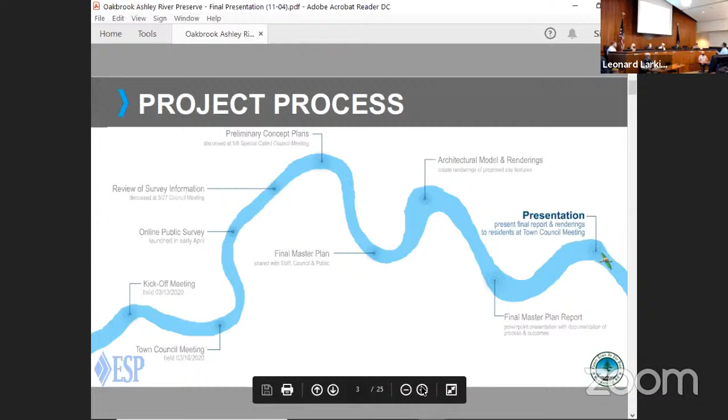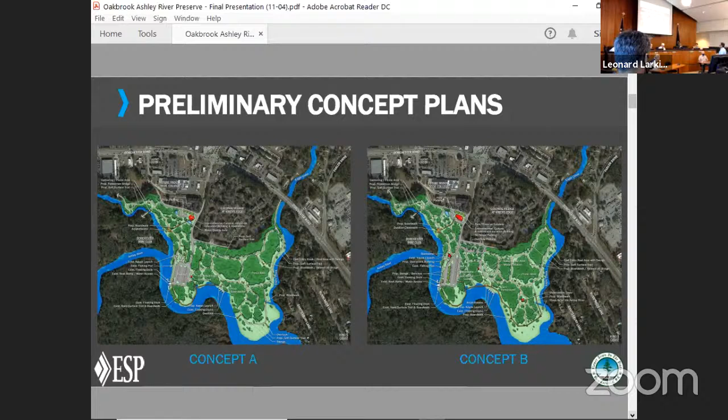So from these two concepts, next slide, is really where we started to nail down some of the program elements. As you might remember, before we had two columns, an A column and a B column of the different programs, and we've taken this opportunity to streamline it into just one column of what our programs are.

An amphitheater, outdoor classroom amphitheater - it's not really a big amphitheater where Dave Matthews or somebody's going to come in and perform. This is a small venue, more of just a gathering along the Dorchester Creek side of it. I would call it the classroom. Again, 3 restrooms, 2 of them in buildings and one's in the multi-use facility.

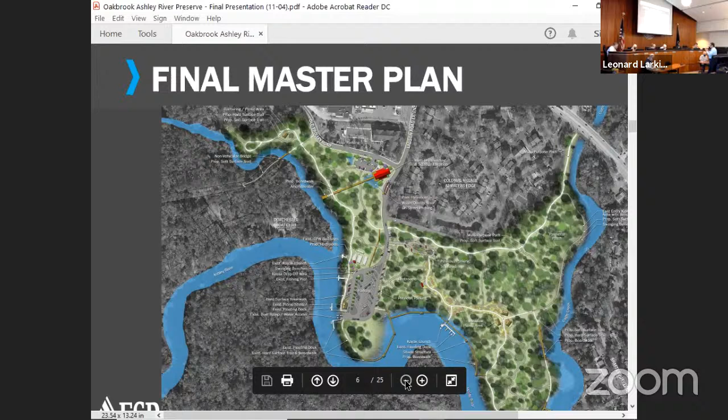Existing boat landing—again, we tried to stretch out the parking lot as best we can, make it more efficient with boat parking, and put a lot of the single car parking around the edges. So if you fish off the edge right at the Ashley River, or on the other side, you can park and take a walk through the woods. The cars with trailers take the most traffic and room; they're down at the bottom right-hand corner as I'm looking at this.

Whenever I put my boat in at this landing, it's always hard to get it in straight, and straight back out. So this is really for my own personal selfishness, to straighten out that boat landing access, so at least I have an easier time putting my boat in.

That's the objective. We're close to some woods and wetlands as we go. We show the existing boardwalk along the bend of the river, but we wanted to add a bit more boardwalk that takes you all the way to what we're dubbing the kayak docks—those are existing docks, and it's a nice way to connect you to them along the river. You're on top of the water, not on the land, so you're not disturbing that natural edge. It's probably going to be a great fish habitat too, along that edge.

Following along, staying on the river—as you come down to the next bend there's another small fishing pier, and then three fingered fishing piers that come out on the second bend of the river. Those fingers come out, not really connected to the boardwalk, but offer more opportunities for fishing and enjoying the river without actually having to be on a boat.

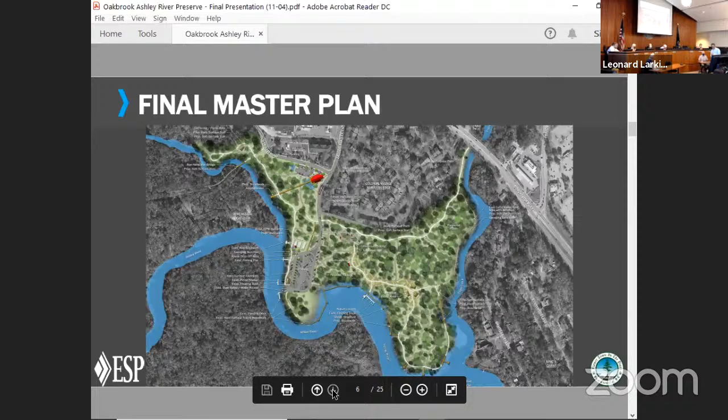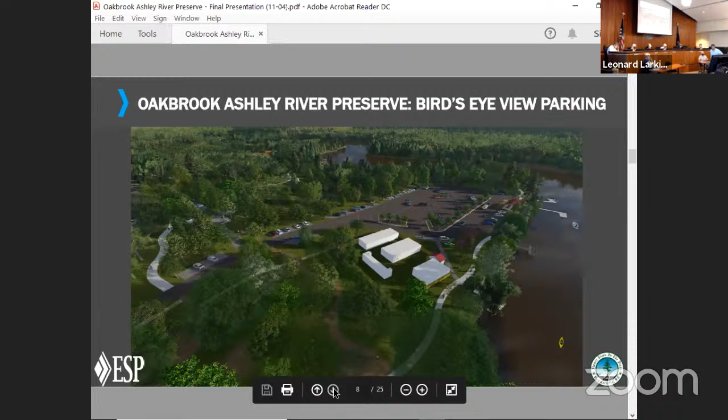A little close-up view. That might be the restroom facility right there, with the existing buildings. We'll enhance the parking lot a little bit. Next slide.

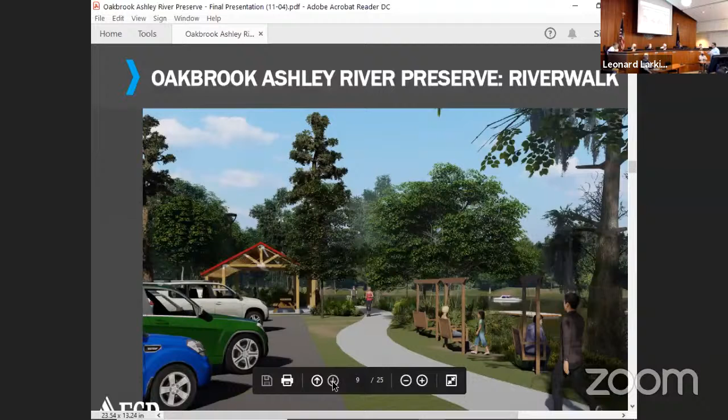This is the existing shelter that's there now, and it gives you an idea of what we could do along the river edge - create a pathway, put some swings there, get a little more activity. Right now it's just there, kind of eroding and trickling apart, so we're going to give it an edge so you can sit and enjoy it.

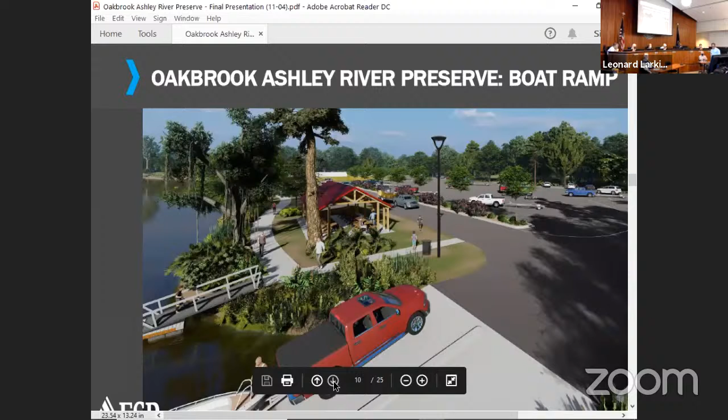Next slide. There's the boat ramp. Again, right now this shelter is surrounded by asphalt, and I'd like to break that up a little bit, add some green in there and soften it. This also gives you an idea of what the parking lot might look like. Right now there are no islands in the parking lot at all - we're adding planted islands to give a little more circulational control, as we call it. It softens things up and adds a little shade, at least a small piece of shade for your car while you're out on the boat. Next slide, please.

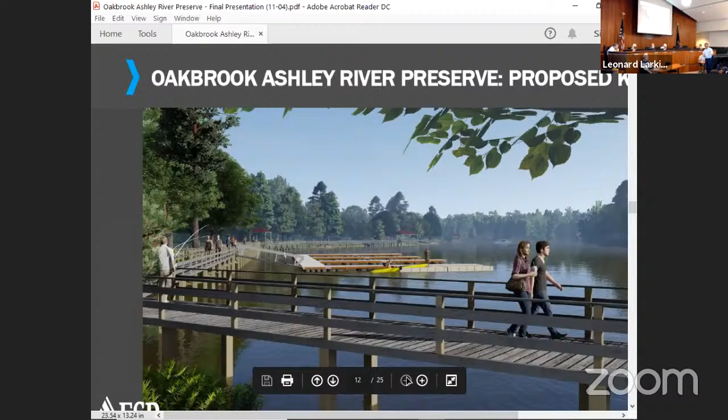Next slide, please - more views from the boardwalk, looking at the kayak launch and kayak docks. And then next slide - existing kayak docks with kind of an end terminus pierhead there, which takes you back inland.

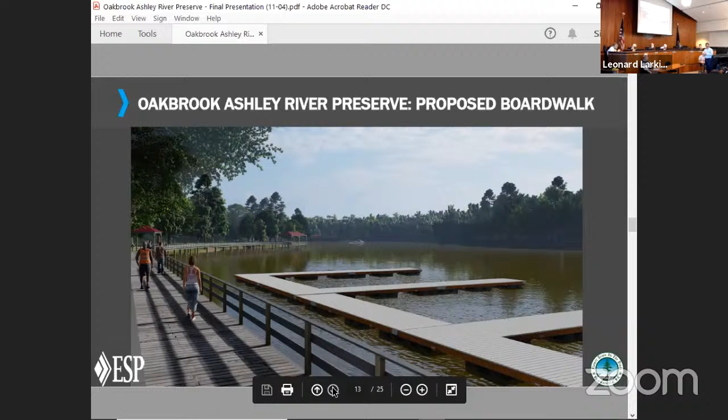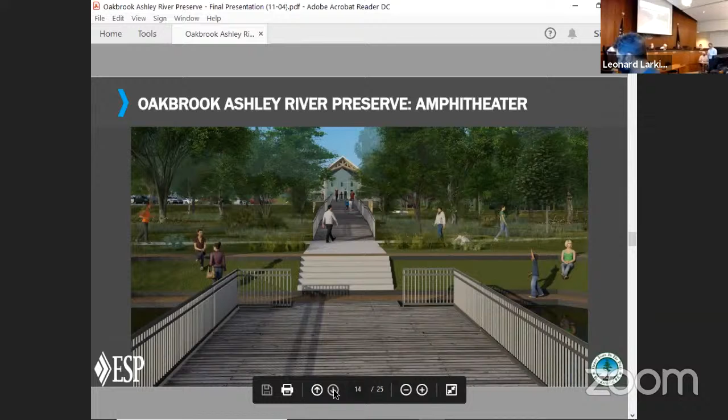Next slide, please - there's your building. Again, taking some cues from Colonial Dorchester State Park and what some of those buildings may have looked like - colonial building, knowing we don't build buildings like that anymore, but it can give it some of that look, with some signage there. Here's your entry feature.

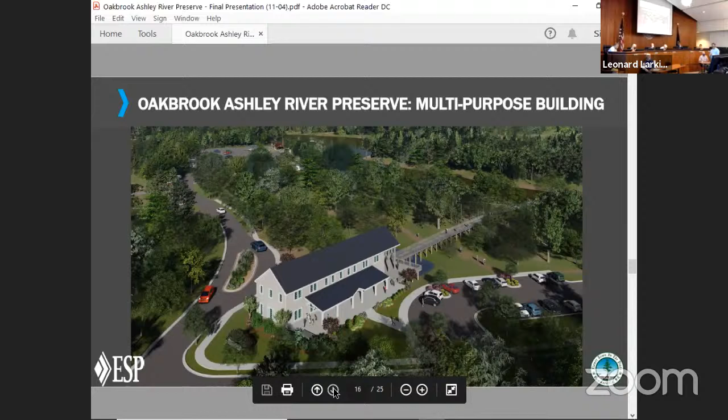So, cost. We're looking at a large budget number for this, and that's really what we're looking at. These are budgets. We've calculated all of our quantities for everything we're suggesting. We're using our best guess judgments based on recent projects we've done. We've spoken to engineers, given terms and ideas, and checked on where we are pricing.

As we all know, construction prices are fluctuating right now. Wood is going down every day just about. So at the moment, these are our budget numbers. It's a big number: $6.1 million for the dream, everything we're looking at.

And we've broken it down into sections rather than phases, because we're not really sure where we want to start. I have some ideas, but we can give you an idea of what each section might go for.

Starting with the red section, which is the boardwalk, the piers, and some pathways. We've broken it down into all the different pieces and parts: shade structures, the elevated trail, hard surface, and the pier heads. We always add the hard costs, the soft costs - surveying, design, engineering, and permitting - and we try to cover ourselves for contingency. So that's about a $900K scope of work.

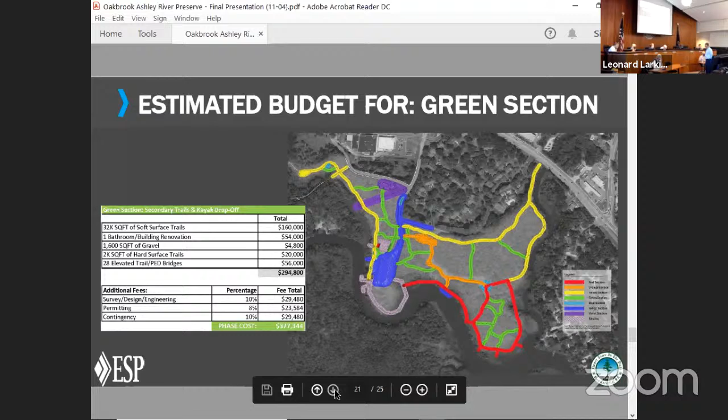Green: more paths, pedestrian bridges, bathrooms. $377,000.

Blue section, which is really a small area up here and the entry, with picnic areas down there. $314,000.

And then I think we had the orange section - piers, parking lot expansion, wetland mitigation that we might do. Again, we're not really sure how much spending we need to do at all. That's a little bit over $1 million.

And I think the last one is the purple, or violet section, and that's the building. We're looking at just a large $300 a square foot price on a building like that - parking lot, small amphitheater, classroom, boardwalk, and all that. About $2.6 million for that.

And again, that's all budget numbers - these are not actual costs. Things can change as the design evolves, but as engineers and planners, that's what we put together. I understand it's an enormous risk on our part to put big fat numbers on this, but I think that's what you asked for, and it at least starts the conversation. We know what the budget was, but at least we know that anchor point of where we are.

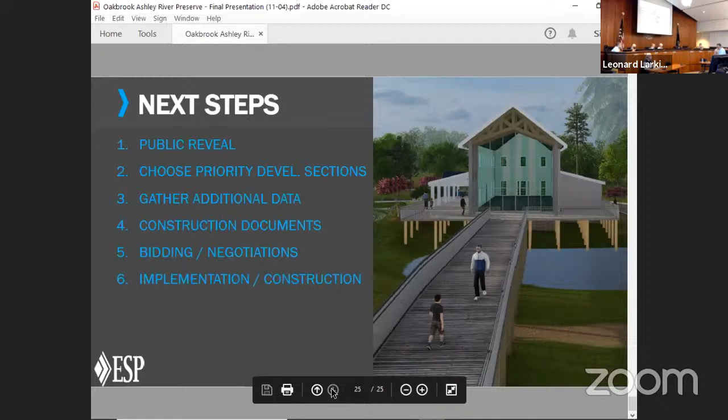It looked to me like when I looked at the renderings you had here, that there was a branch of the bike trail going down near the creek. Kenny, can you put that back on there where it showed the different colored path? Isn't all that yellow pavement coming across the top the bike path, and what's that to the far right extending down? Can you click back to where it says the orange section?

So the orange section, and we have this parking lot, obviously. I'm talking about that yellow line there, up at the top, below the woods. Starting there, going up, that is asphalt.

Now, coming down to where it branches off down here, what's that? That's gonna be a soft path, a mulch trail. Okay, so the only pavement would be across the top extremity there? That's the intention.

That's what we all talked about last time. Bring bikes through here so they can run through and then out, up the Sawmill Branch. The intention is, obviously, bikes are gonna come to the parking lot.

Yeah, but the intention is not to turn this into a mountain bike. Yeah, well, I misread what that was, okay.

Also, somewhere in here, there was $75,000 for wetlands mitigation. Could you explain what wetlands would be involved?

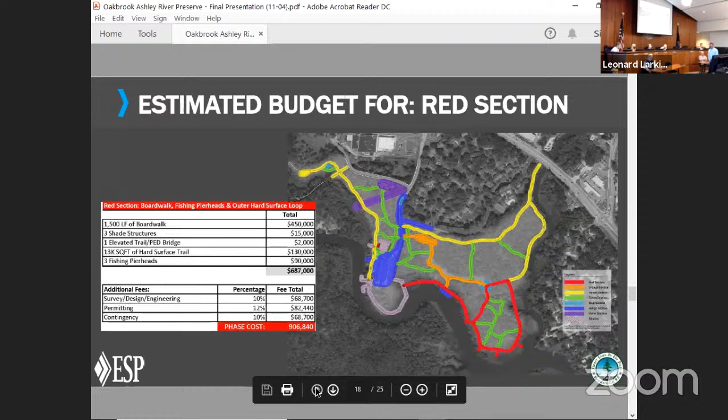Okay, and I think I've got one more issue, and I like it overall. Well, can you go back to the stuff that looks like photographs, but it's not? Rendering? Yeah, the renderings, where it shows the boardwalk. Yeah, well, that one.

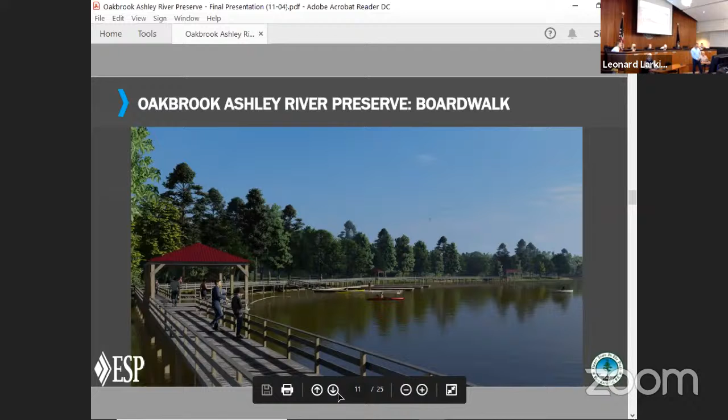Is this part of the existing boardwalk, or does that show? Some of it is existing. I think if you go back one more, go forward. I'm sorry, wish I was driving. That's new, that is new boardwalk. All that down here is new boardwalk, and all the way down to here is that new pier. That's that first fishing pier finger that you see out there.

Bob mentioned this when he talked a few minutes ago, but I'll mention it again. In the conceptual drawings, it appeared to me that the pathway along the riverfront would primarily be on the ground, a soft path where there'd be vegetation, and at points you couldn't see the river, maybe at other points you could, a view either of the woods or the river. I wasn't anticipating something that basically wrapped around the whole piece of property out in the water. I think that obstructs the view of the shoreline.

It makes a curved shoreline look angular, and in addition to that, it's a heck of a lot more expensive to have the pilings out there and all the lumber that you're showing. I think we could get a better product and save a whole lot of money if we had most of that stuff on the bank and not in the water. Again, the conceptual drawings appeared to show what I'm talking about, not something entirely in the water like that.

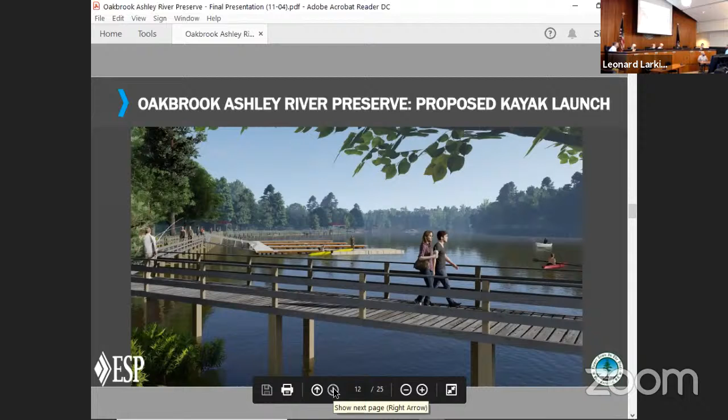I guess my thought from the renderings, I don't know if you're going forward or backwards, but it's a couple renderings over where it shows the existing shelter that has been landscaped a little bit. With that one, yeah, not the other way. Right, well these two together, the previous one and this one.

If the idea is that somehow or another we're going to eventually scrape together, I'd have to say at least $6 million, because it's only going to get more expensive if we do this over a fairly lengthy period of time, it just strikes me that not just the functional improvements but the aesthetic improvements to the parking lot, to include the rendering we're looking at now, and also the previous one, I think it's the previous one that shows the beginning of the Riverwalk.

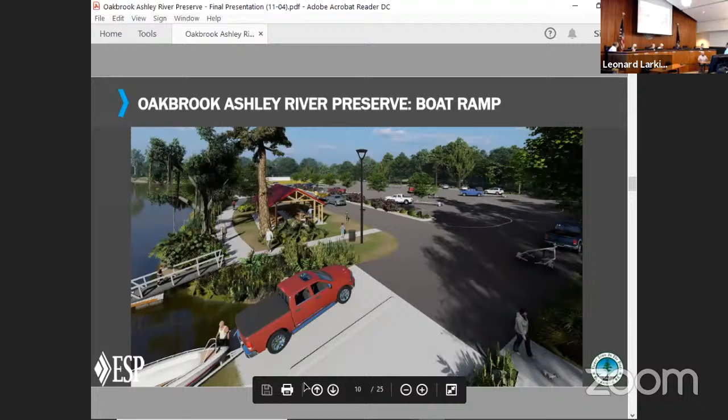That's how you're going to generate interest in this. I don't completely subscribe to the idea of build it and they will come. I don't want to, if we plunk down $6 million in the next 6 months, I don't know how much we should get. But I know right now that area around the shelter, with asphalt all around it and the parking lot, the way it functions, it doesn't function, and the way that it looks, it's just not very inviting at all. And what we have now is incredibly underutilized. So I really do think, not only from a financial standpoint but just from a strategic standpoint, as much as we can do early on improving the aesthetics of what we have now, we're talking about the shelter, it just seems like it needs to be the focus of whatever early expenditures we have.

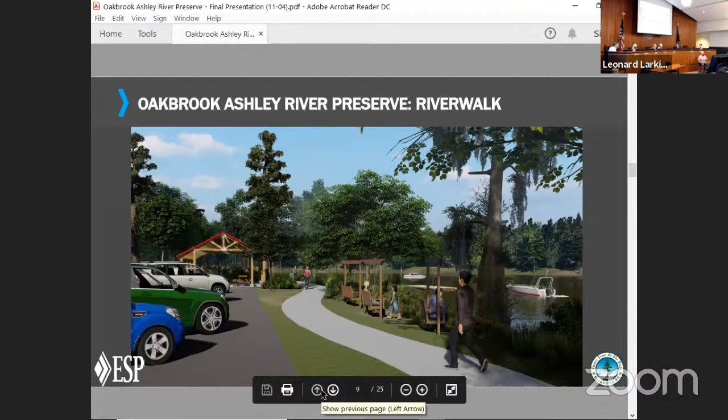So Mr. Jackson, are you envisioning that we look at doing the Indigo section, which includes the repairs and the resurfacing of the existing parking lot expansion, pervious parking, kayak launch, and whatever wetlands mitigation we need to do for that? Is that what you're thinking of?

Yes. Okay, the parking area here, and then allowing our people to work on this part, the gravel parking in here, well this way, just opening the trails up, just simply cutting the brush out, like trees, and allowing people to walk through. There may be some wet areas, some people care, some won't. If we get time we can use boardwalks. They do a great job on Springview Park with boardwalks and all. And we can go from there.

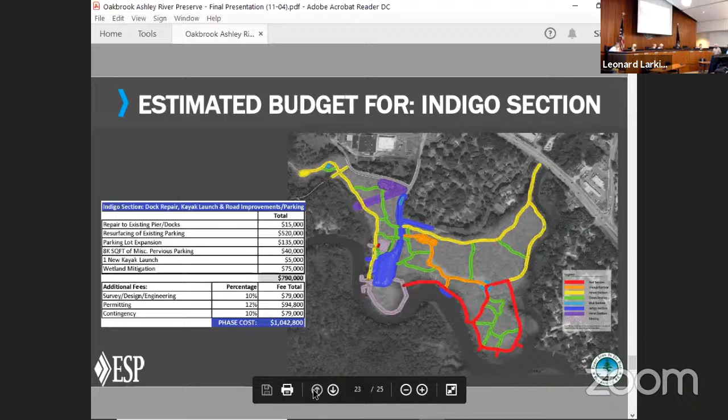We take a quick look again at the estimated budget for the yellow. And for the yellow, we're envisioning that we can do that, Amy? Yeah. We did not anticipate the town of Summerville doing any self-perform. Right. And from council, I would expect that Amy and Russ can run their people to do it when they're slow.

And that's the main reason for trying to get it started now, is grass cutting is coming to an end and all the brush is dying out, so then you may have some free time to try to push this through. And particularly just opening it up, I hired somebody to do my land, and kind of went crazy, left my property with the thing. They can cut the trail faster than you can walk. Matter of fact, I was running and couldn't catch them. So it will not take long to open these up, and they can even open up what may in the future be paved, and you can walk on it. And I'm sure that you can raise enough to bike on it too.

It would just seem to me that the Indigo section, the yellow section, and the existing section together is a pretty good starting point for this part.

And if yellow and indigo together are estimated to be 1.5, 1.6 million, without us using our own internal resources—and we talk about using some internal resources—that might be something we could do sooner rather than later. But knowing that, Dean called it the dream, it's the six; we don't have $6 million for that, so that's the bottom line.